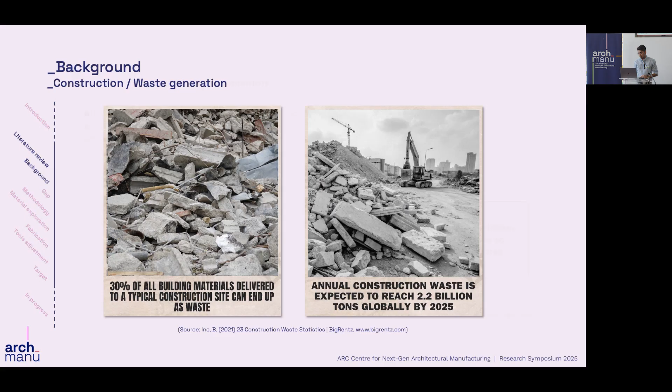For my PhD, I proposed my research around two major issues in construction: the lack of sustainability and the need for it to evolve with new design methods. The construction sector is a major contributor to global waste and greenhouse gas emissions. By 2025, construction waste is expected to hit 2.2 billion tons, with the market value reaching 232.1 billion US dollars. Around 30% of the material delivered to construction sites ends up as waste. The construction industry is responsible for 34% of global energy-related CO2 emissions, and accounts for 40% of annual greenhouse gas emissions. All these numbers show how urgently we need to change things in this field.

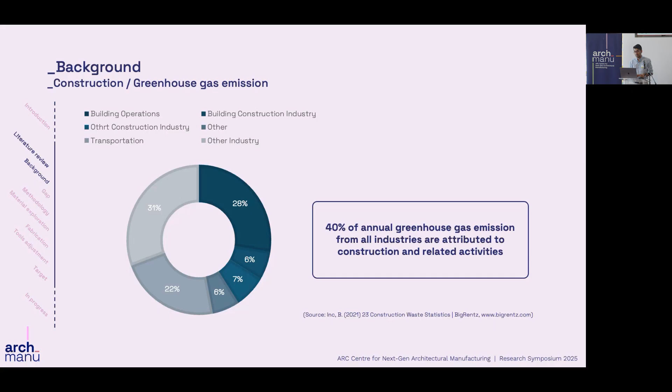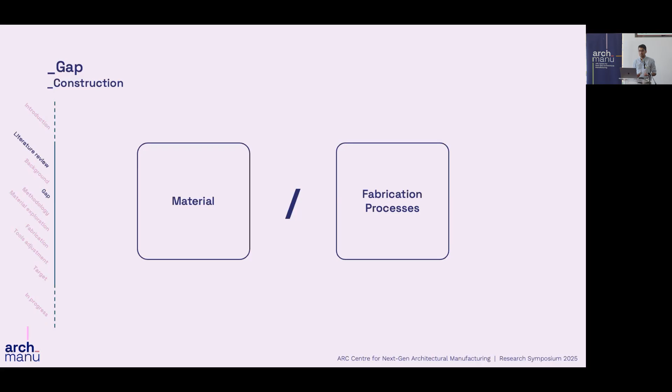What is the gap? There are two key areas that impact the environment: the material used and the fabrication process. Many materials like concrete, steel, and plastic are non-biodegradable and hard to recycle. At the same time, the rise of computational tools in architecture has led to more designs with complex geometries, but the construction process hasn't kept pace with these changes. For example, for fabricating complex geometries, custom molds have been used, which is not very efficient and needs an upgrade.

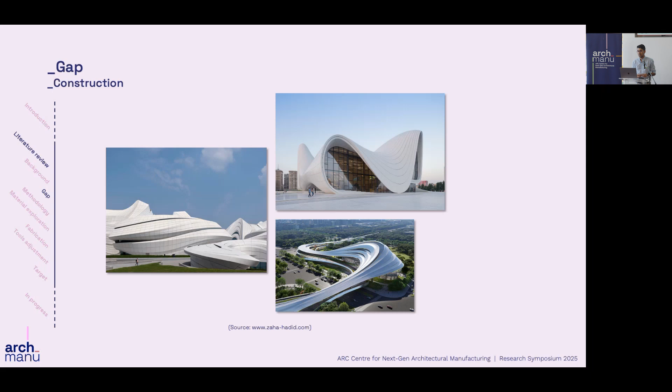To address these issues, my research focuses on two main approaches: decarbonization by using renewable low-impact materials, and digitalization by leveraging tools and technologies for more efficient production.

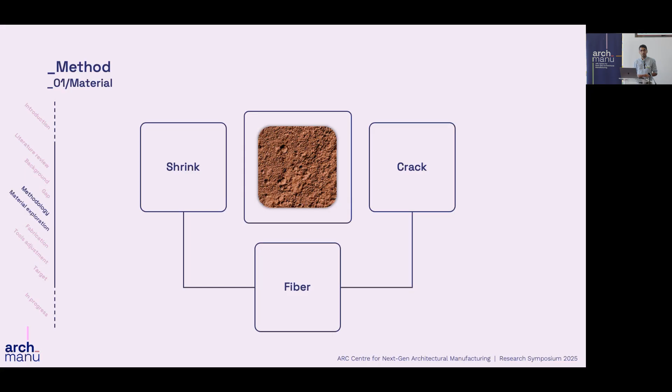So how am I going to do that? When we talk about material in construction, this study points out that earth is still a fantastic resource for construction. It has been used throughout history, it's well-known, abundant, readily available, low cost, and locally available. This makes it an ideal choice for construction in remote areas. But it still needs some work because it can crack and shrink during fabrication, so we can fix it by adding additives like natural fibers. I'm looking into how combining earth with fibers, including hemp as a first option, mycelium as second, and spinifex as a third, can enhance strength, durability, and environmental benefits.

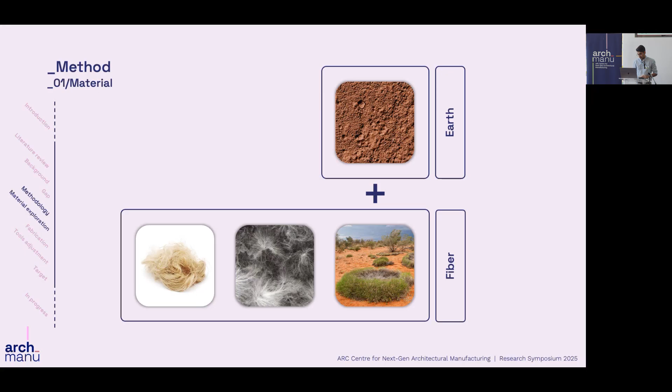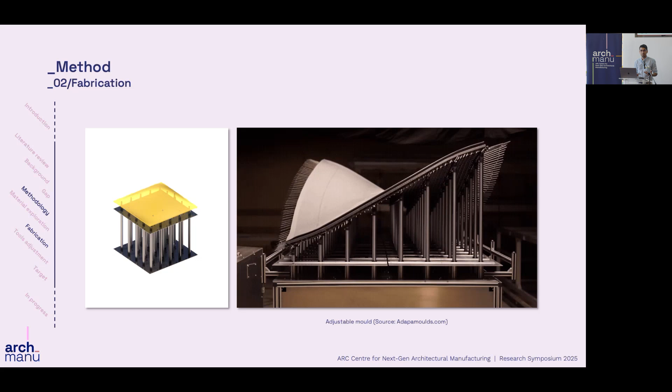Secondly, as I mentioned earlier, architects are really moving toward designing more complex geometries these days. A big innovation in this is using an adaptive mold system instead of custom molds. Unlike custom molds that can only be used once, this adjustable one can be modified for different configurations and designs. What I'm going to do is use an adaptive mold system along with a robotic arm for 3D printing to create large-scale freeform facade panels.

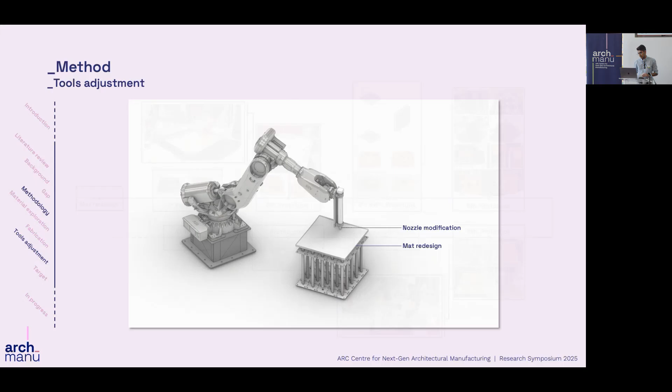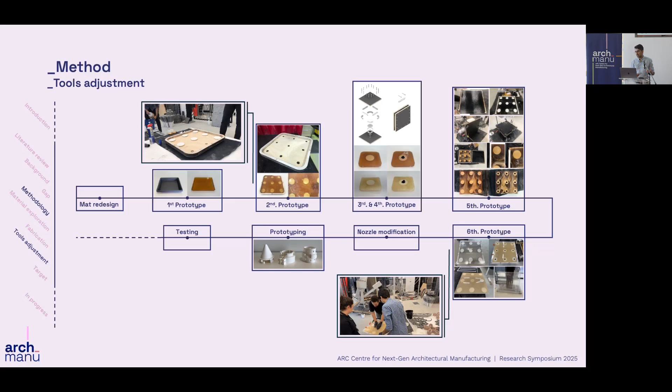So far, I've taken some initial steps, like modifying the adaptive mold, redesigning the bed base mat, and designing a new nozzle. I want high accuracy from the adaptive mold because I want to 3D print on it, so I redesigned the existing chain bed mat into an elastic rubber mat. I've also been working on a nozzle for 3D printing, since there are some challenges in 3D printing like clogging the nozzle or refilling the extruder or the tank. So I designed my own nozzle to tackle these challenges.

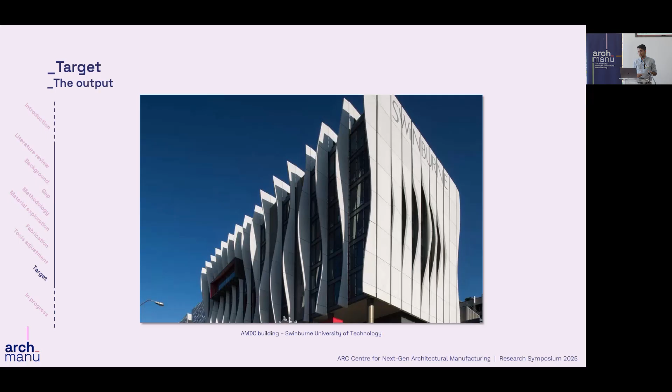Today, freeform concrete panels are quite popular, like one of the buildings at my university, Swinburne University, which has them in its facade. But I think there is a gap, and I can fill it by using sustainable materials and digital tools instead of traditional approaches.

When it comes to the final output of my research, there are a lot of projects out there looking into automation in earth construction. As I mentioned, the main goal in my study is to create complex shapes. There are some projects using timber mold or metal mold, and others looking for more intricate designs using a PETG printed mold. My research is in line with this effort, but instead of sticking to static molds, I'm going to use dynamic molds.

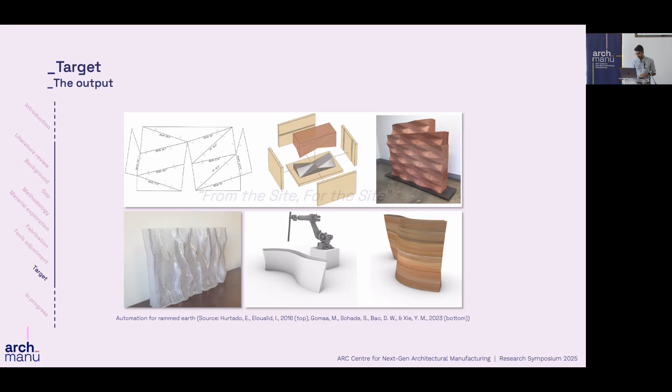So in the direction of my research, I have another goal. It's a future goal that I believe will make a difference in the industry, centered around the concept of 'from the site, for the site.'

This means that by using soil from the site for construction and incorporating digital tools, we can save on cost and time, since we won't need to transport material to the construction site. Plus, we can reduce the number of laborers and increase the workload without sacrificing accuracy. More importantly, on top of all these benefits, this is a sustainable approach.

However, achieving these goals involves confronting many challenges that I'm actually studying in parallel with other research.

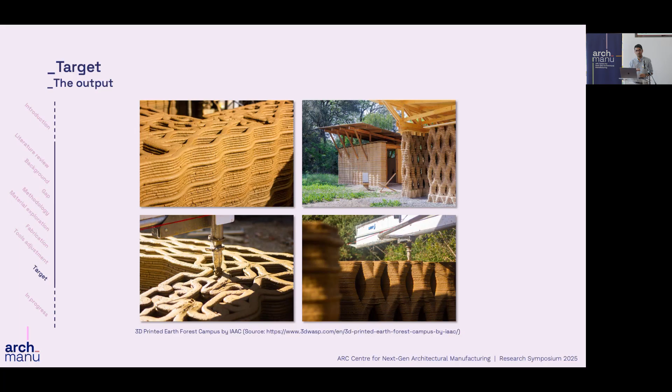To move forward, I've outlined several key steps. First, I'm going to finalize the design modification of the nozzle based on feedback that I get from action research. Then I'm going to focus on the material mixture by combining earth as a primary substance and hemp as an additive. Then I'm going to test the rubber mat, and after that, do 3D printing on the adaptive mold and fabricate a small scale prototype. This is for the next 6 months.

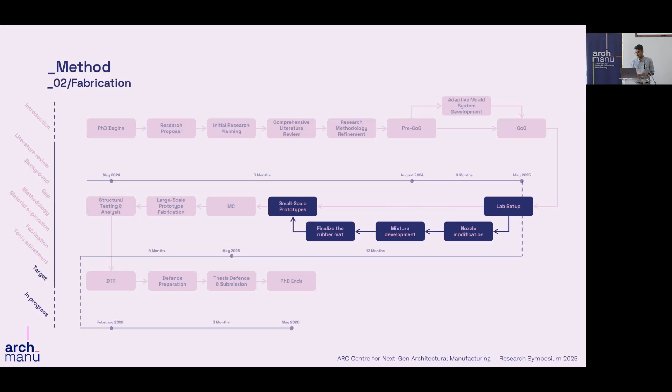After that, I'm going to fabricate large scale prototypes, and at the end, I'm going to evaluate them. Thank you for listening. If you have any questions or recommendations that could help me improve my research, I would love to hear it.